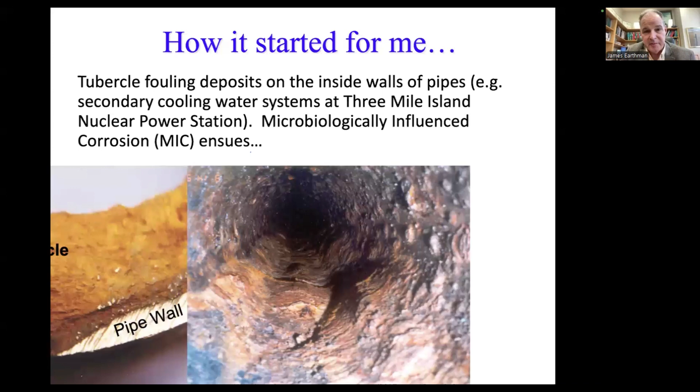And this is the problem that they create eventually, is that these tubercles get colonized by bacteria that can induce corrosion. The upper parts of the tubercle are typically colonized by aerobic bacteria. They consume the oxygen coming in, diffusing into the tubercle. And then at the bottom, there's typically anaerobic bacteria like sulfate-reducing bacteria that can thrive down there because there's very little oxygen as a result.

And the sulfate-reducing bacteria create iron sulfide. And the iron for the iron sulfide comes from the pipe wall. And so as you can see, you tend to get this localized corrosion, and eventually the bacteria will eat through the pipe wall, and then you have a leak and you have to shut down the system. Very expensive. Here's another pipe that had this problem.

Now, about that time, I happened to be in the Office of Research. I was Associate Vice Chancellor there, and I went to the Canadian Consulate in Los Angeles, and I met a couple of guys from a company in Irvine, and they had a water treatment system that they were talking to people in Canada about, and since they were from Irvine, I of course wanted to find out what they were doing.

They mentioned that they have their water treatment system in 36 different golf courses in Southern California, and they could demonstrate that if you use their system in the irrigation, you can grow greener grass with less water, and they could convince greenskeepers, who are typically very conservative people, that this is something they should lease. And I thought, well, I need to introduce these guys to Bill Cooper, because he's the director of our water center. He should know about this.

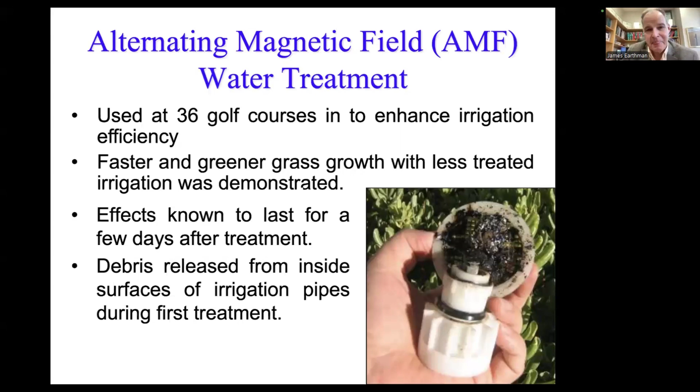So, Bill, if it weren't for you, I wouldn't have ever gotten into this area at all. So, thank you for doing that, and I appreciate you coming to lunch with us, even though you didn't follow up with them, and I understand why you didn't.

So we set up this proof of concept, and the pipe that was sent was in service for 30 years. It had a lot of tubercle deposit on it. They sent it wet, and they also sent two carboys, I think, of water from the secondary water system. So we used their water.

We set up two different test systems, two flow loop systems, one without their treatment, one with their treatment. We cut the pipe into two sections. We put one piece in each of the flow loops and started running the flow loops, one with the treated water, one without treated water, to see what would happen.

And so after 48 hours, we looked at the two systems, and this is an aquarium that we used as an expansion tank for one of the flow loops that had their system. This is their AMF. I call it AMF. It's alternating magnetic field, and I'll explain why later. And you could see that the water was fairly clear here. It didn't look too bad.

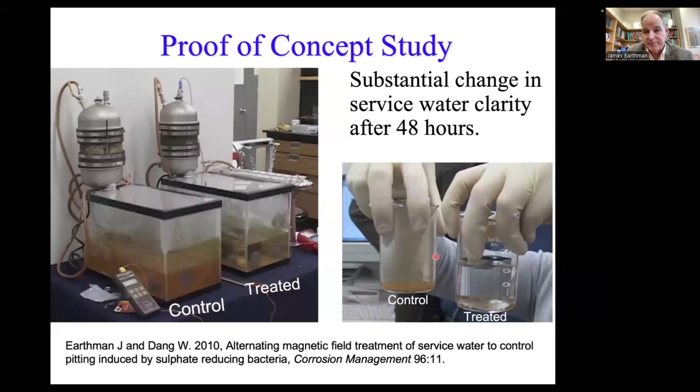Here's the water in the control system, and this is how it came. This is exactly how the water looked when it came from Three Mile Island. It was rusty colored. So we took some of the water out, and sure enough, it looked like you could almost drink the treated water. This is only after 48 hours of this AMF treatment.

We looked at the pipe samples, again after 48 hours. Well, the control pipe looked exactly the same, still had the same amount of deposit on it that it had when we put it in. The treated pipe looked a lot different, though. It had a different color on the inside. Let's go back and I'll show you.

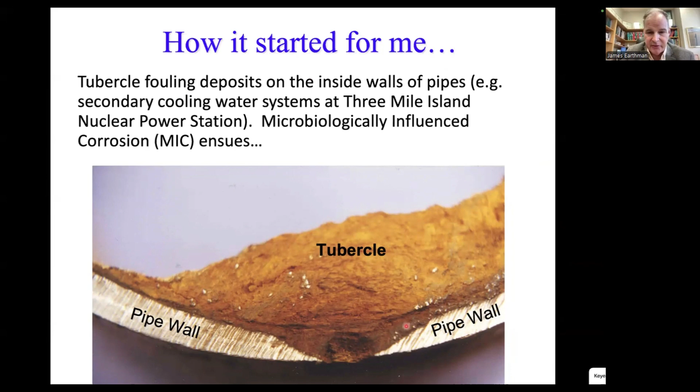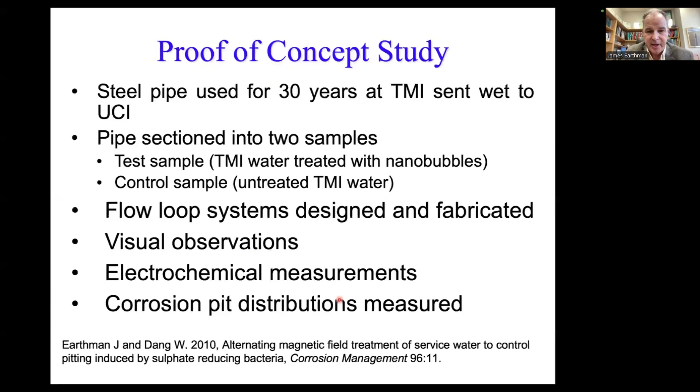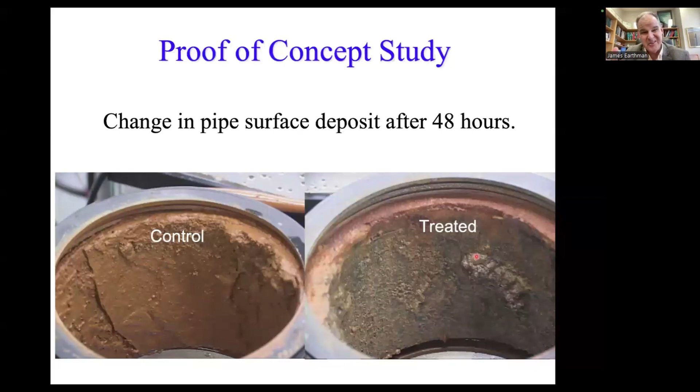If you remember, there was a change in color as you get down to where the sulfate-reducing bacteria are producing iron sulfide; the color changes to a gray color. Here's another example. Well, this is the gray color I was seeing on the inside of that pipe. So I knew we were down close to the substrate of the metal at this point. There was only this one little nodule left from the tubercle that sat on that pipe. So this is pretty dramatic. I thought, wow, I don't know what this is doing, but this is really interesting.

And in the expansion tank, in the treated water, there was this pile of debris that had formed, apparently from the pipe wall that had just fallen off. I thought, wow, this is something that's really, really dramatic, and I need to find out what's going on here.

So I started to talk to people on campus about it because it was clear that the people at this company didn't really understand what they were doing to the water. They said they were creating more energy in the water, but that was about it. That's about their best explanation for what was going on.

So I eventually got Ruqian Wu in physics involved, Professor Ruqian Wu, and we started talking about this. And he suggested, I think they may be creating nanobubbles. Now, I didn't know what a nanobubble was at that point. And so I started looking into it.

And the one thing I did know about this system is that the water that flows through it does undergo an alternating magnetic field. It's got permanent magnets that are arranged in such a way so that when flowing water comes through there, the water molecules experience a magnetic field that's oscillating, right? Depending on the flow rate, that'll determine your oscillation frequency. So the flow rate's very important, and that's all this was doing.

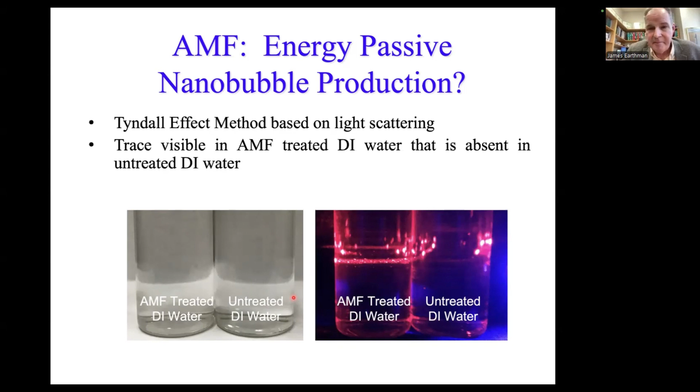But I did find that if we take deionized water and we run it through this AMF system, I can get this effect with the laser pointer. This is called the Tyndall effect, and this is what I showed you in the beginning. And people were reporting that this is what nanobubble containing water does. The problem, though, and the horrific part of it, is there was no real good theory for why nanobubbles should exist. There was a lot of skepticism out there in the literature. A lot of people didn't believe they could exist. And there's a good reason for that.

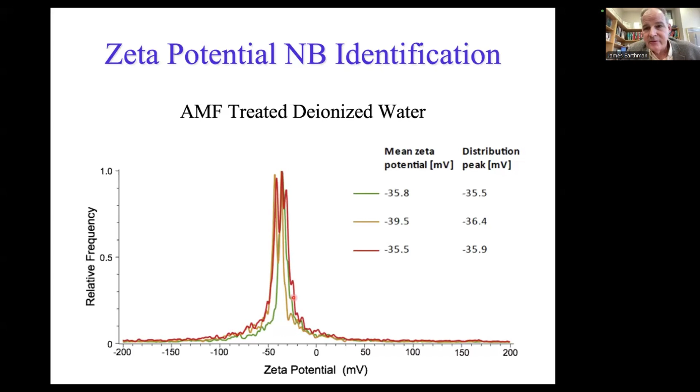The other thing I wanted to mention is in addition to doing this Tyndall effect test, we also measured the zeta potential of deionized water that we ran through this thing. And it was about minus 36 millivolts. We did 3 replicates, and we were pretty convinced that's what the zeta potential is for this. And of course, if you don't treat the water, we don't get anything for deionized water for this zeta potential measurement. This was done with an Anton Paar instrument. And so I looked up in the literature. Yeah, that's what the nanobubble should have in terms of a zeta potential. So that was also evidence that this thing was creating nanobubbles. But I couldn't find a good theory for why nanobubbles should exist.

There's other conventional nanobubble generation methods that people were already using. This is one we have in my lab now. It's what I call dissolved gas decompression. You put water in a container. This is actually a modified seltzer bottle. You put gas pressure on top of that water. 100 psi is enough. And then you release the water out a small orifice and tube, and microbubbles are produced. The water comes out cloudy, and after the microbubbles shrink below a certain size, the water gets clear, and that's when you have nanobubbles.

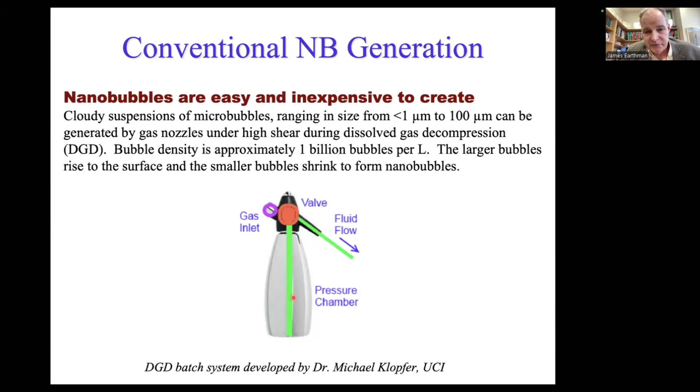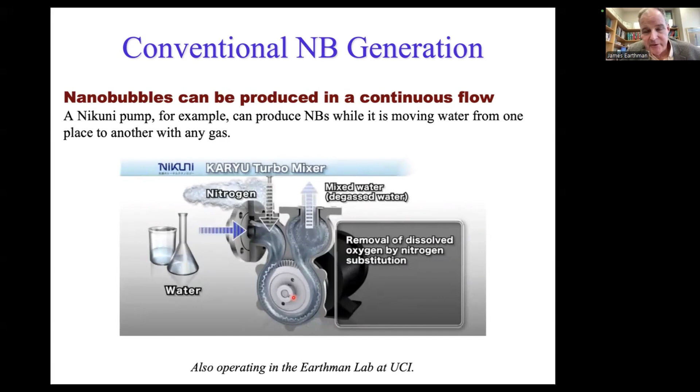Okay. Here's another method for making them. This is called a Nikuni pump. It's made by a company called Nikuni in Japan. They have an American division now that are creating these pumps specifically for generating nanobubbles. And they can show you that you can put different gases in the nanobubbles. And so if you take nanobubbles from those types of techniques, this is from the seltzer bottle, this dissolved gas decompression, you do get the zeta potential in this range of minus 30 to minus 40 millivolts, which you'd expect for nanobubbles in deionized water.

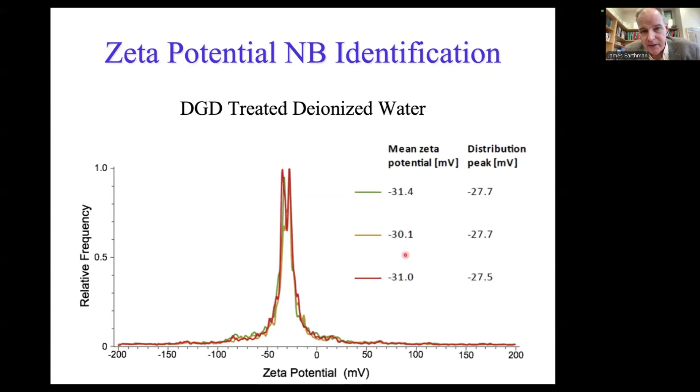So the problem is this.

Macroscopic bubbles, as we know, are just buoyant. They go up to the surface and they dissipate at the surface typically. A microbubble below 50 micrometers in diameter shrinks. The reason why it shrinks is that at that size or smaller, the surface tension pressure is high enough to push the gas back out into solution. So the bubble shrinks, the gas goes away.

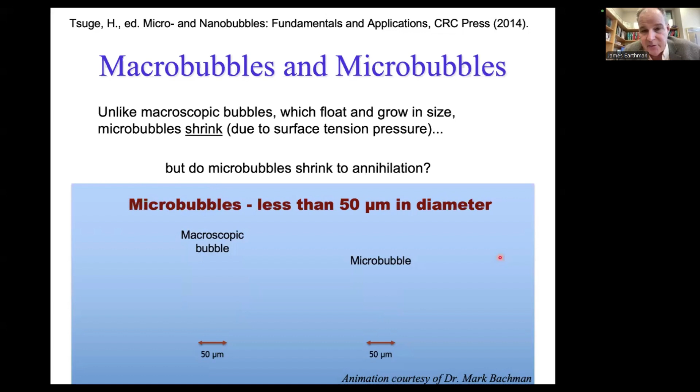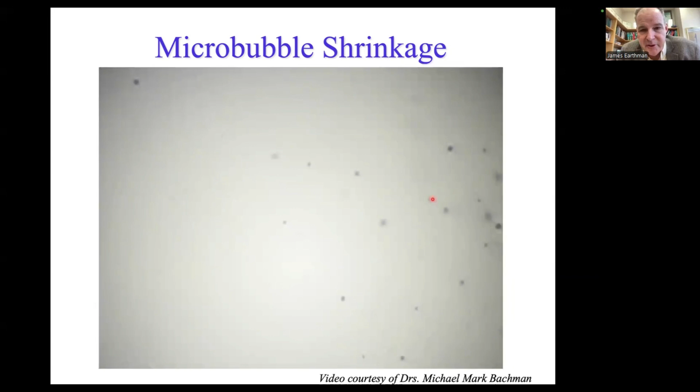And so most people who observe this, and we're going to look at it in a minute, thought that these microbubbles just shrink to annihilation because the surface tension pressure is only going to increase as the bubble gets smaller. So here's some microbubbles here. This is a video of microbubbles shrinking. You can see that it looks like they just go away. They go away to nothing, right? Here's another replay of that. Microbubbles, and they're shrinking, right? This is observable in the optical microscope, no problem.

So I fortunately at that time had a graduate student from India, Patrick Sapudi, who had a really good background in chemistry and physics. And I started talking to him about this, and he got excited and interested in it, and he wanted to work on it. And I said, okay, let's work on a theory for this. And so we did.

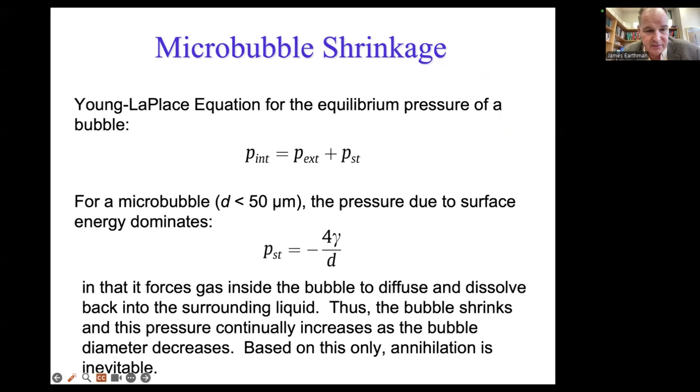Some reason my slide's not advancing. Let me try this way. Okay, there it goes.

So again, nanobubbles were observed by several research groups. There were a lot of groups in Japan for some reason. I'm not sure why so many groups are working on this in Japan, but a lot of groups in Japan were working on what they were calling nanobubbles. And they were reporting that nanobubbles tend to be around 20 nanometers to 1 micrometer in diameter. And they can be stable for many days. They were already seeing this long-term stability.

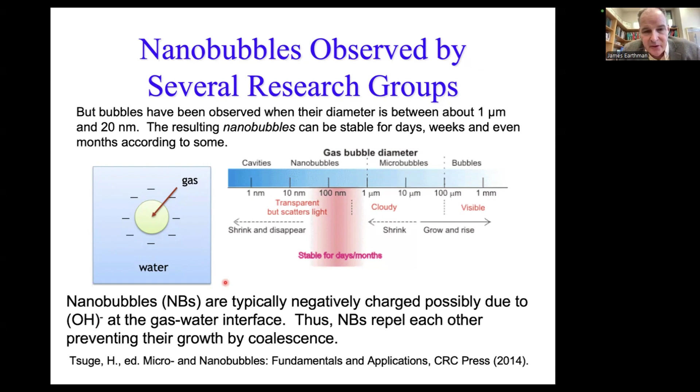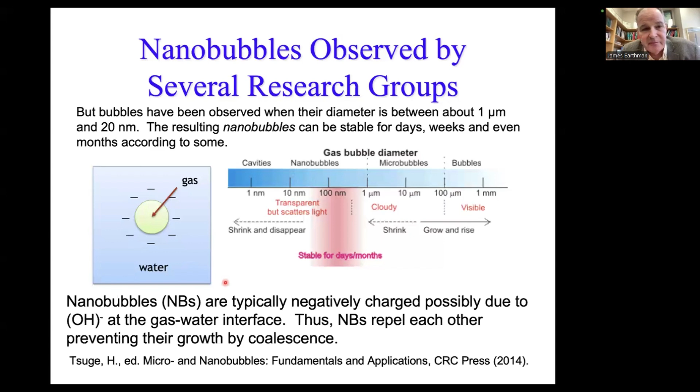And the nanobubbles were typically negatively charged, as I showed you with the zeta potential. And a lot of people were attributing this to OH ions, which are negatively charged. In deionized water, that's about all you've got in the water that's negatively charged. So that kind of made sense to me. Also interesting about the nanobubbles is they repel each other, so they don't coalesce. They don't come together and make bigger bubbles because they're all negatively charged. And a lot of people were reporting this minus 30, minus 40 millivolt zeta potential for them.

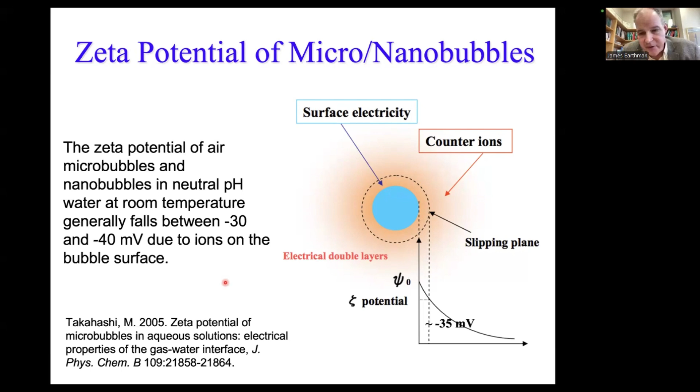And as a matter of fact, Takahashi, as you can see here, did a study where he measured the zeta potential for smaller and smaller microbubbles, and you can see that the zeta potential doesn't really change in neutral water. It stays within that minus 30, minus 40 millivolt range. That was kind of interesting. Zeta potential doesn't change. Whatever's on the surface of the bubble doesn't seem to be going away as it gets smaller.

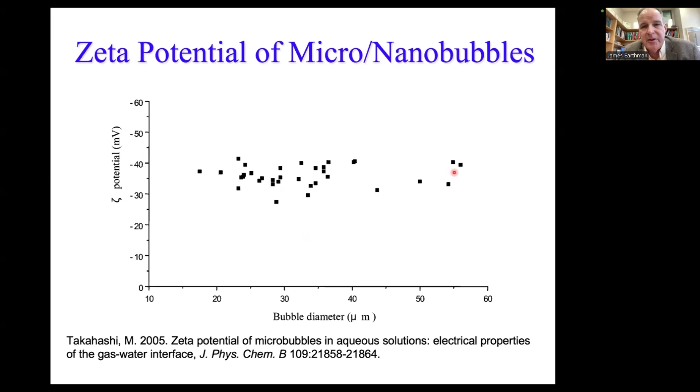All right, so we started looking at how OH ions could be doing this. And it turns out, not long before this, there were some publications which showed that OH ions actually have a huge affinity to gas-water interfaces. They will knock other ions like chloride ions off the gas-water interface to get there. And this was being reported.

Bai and Herzfeld, as you can see there in the third bullet, attributed this strong affinity to suppression of dipole moment fluctuations by the ions and a reduction of the loss of hydrogen bonds compared to water molecules at the interface. So there was a lot of literature and evidence to support the idea that OH ions have a much lower energy at a gas-water interface, and they want to stay there.

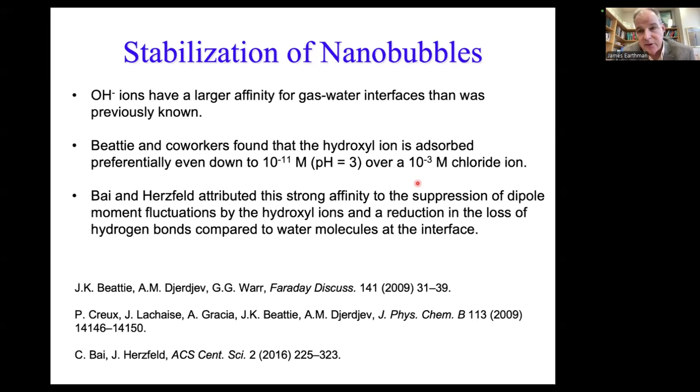So we introduced another term to the Young-Laplace equation. And this is a pressure due to the repulsion between ions on the surface of the bubble. We started doing calculations of what you would expect in terms of concentration of OH ions on a microscale bubble. And it turns out that you really don't get enough ions to do anything. They're not close enough together on the microbubble to repel each other. Therefore, you don't get stability.

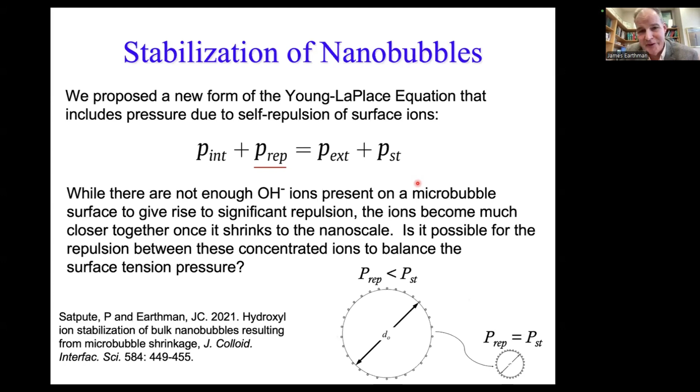But ironically and counterintuitively, if you take a microbubble and calculate how many ions it has on its surface and then shrink it by about 100 to 1,000 times, you'll find out that the ions that you start out with start to get really close together, and they start to repel each other. And so that was our theory. That became our theory, that it was the microbubble shrinkage itself, the thing that made it counterintuitive that nanobubbles could be stable, that actually leads to the stabilization of the nanobubble.

And one thing that was nice for me as a material scientist is that the ions, as they get closer together, should naturally form a close packed array. Now, we have lots of close packed arrays in material science and crystal structures. And I knew how to treat a close packed array of atoms, or in this case, ions, that had forces between them. And the force, of course, here results from the Coulomb charge that each ion has. And we could calculate what this repulsion pressure is.

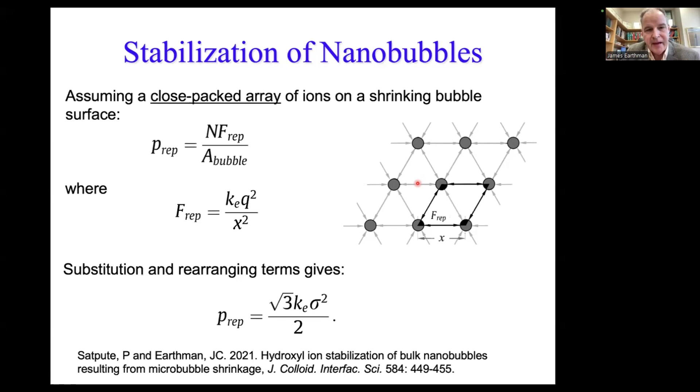And if you work through the math, you will find that the repulsion pressure, I'll just skip to this last result because this is really the important result. I can go through these other equations if you like, but I just want to show you this result here at the bottom. That repulsion pressure goes up by 1 over the diameter of the bubble to the 4th power. Okay? So that means it's going to catch up with the surface tension pressure, because the surface tension pressure goes up by 1 over the diameter.

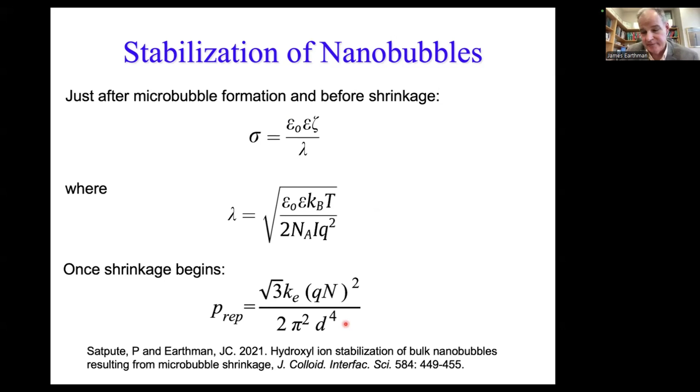So that was great. So we did some calculations, and lo and behold, you do get that this repulsion pressure will balance the surface tension pressure in the range of bubble sizes that were being observed for nanobubbles. The largest of which should be about 1,100 nanometers, because that corresponds to starting out with a 50 micrometer microbubble. If the microbubble is larger than this, it won't shrink. Surface tension pressure is not high enough. But if it's this size or smaller, it will shrink to the nanoscale. And according to our theory, it should stop shrinking because of the repulsion pressure at about 1,100 nanometers.

Okay? So first thing I wanted to do when we saw this is see if there was any experimental data to confirm this, and it turns out there is. This is some data from a group in Japan who did Zetasizer Nano measurements. This is a light scattering technique. They could measure the zeta potential. They could also measure the size of the nanobubbles with this instrument. And it's a light scattering method. It uses a CCD camera.

And they measured the distribution of nanobubbles produced by a large, diverse microbubble distribution. So they would start out making microbubbles. They wait for the microbubbles to shrink, and then they would make these measurements of the nanobubbles. Okay, and these are the average of 10 replicates for them. The mean microbubble diameter they start with was 56 micrometers, so even above the 50 micrometers in size, but anything larger than 50 micrometers won't shrink, so it won't form a nanobubble, according to our theory.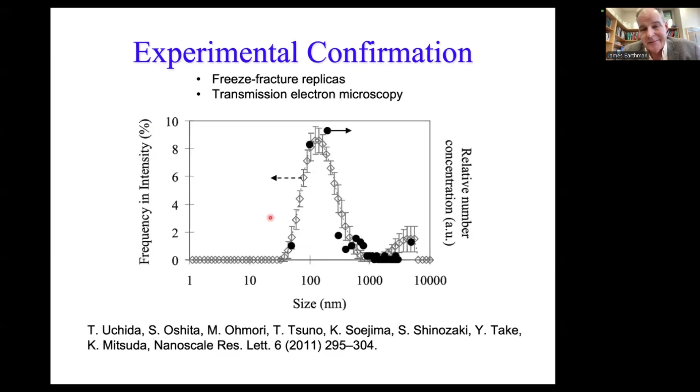And that was actually one of the criticisms of our paper. And when I explained to them, look, yeah, you can put a lot of pressure on these things, nothing will happen, but look at where they're balancing at. After I rebutted that comment, we got accepted.

Anyway, what I was really interested in was not so much the nanobubbles themselves, but how they interact with nanoparticles. Nanoparticles have a very high surface tension as well. And if they encounter a nanobubble, they will bind to it. The hydrophobic forces can actually overcome differences in charge between the nanobubble and the nanoparticle. In other words, if I have a particle that's minus 5 millivolts, it'll still bind to our nanobubbles, which are minus 30 millivolts or more. So this hydrophobic force at this size scale is really powerful.

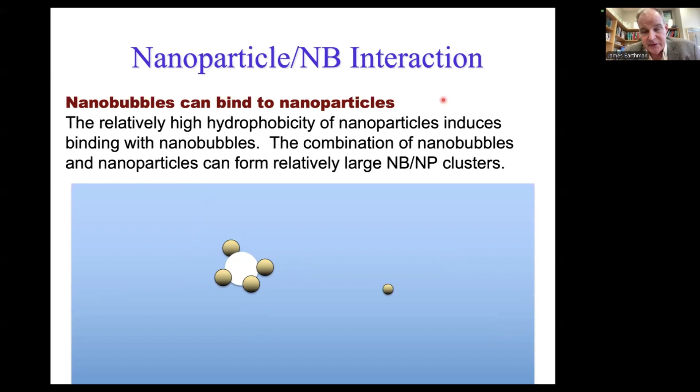Now, these particles may not be stable. They may be embryos. They could be at the solubility limit of this solid, and they could just be forming and dissolving over time. But if they bind to a nanobubble, their surface tension is going to go down and they're going to become stable. And if we keep doing that, we can force the concentration of that solid to below the solubility limit.

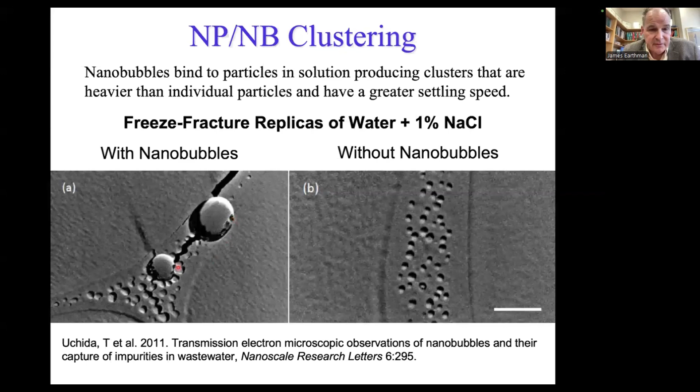Here's some freeze fracture replica images of some nanobubbles and nanoparticles that were published by Uchida and his group. And you can see here, this is for 1% sodium chloride. So these are sodium chloride nanoparticles here. And you can see that some of them seem to be binding to this nanobubble. This is just with the nanoparticles, the sodium chloride without the nanobubbles. So here you can see the nanobubbles, pretty clear distinction. And you can see the nanoparticles are binding to them.

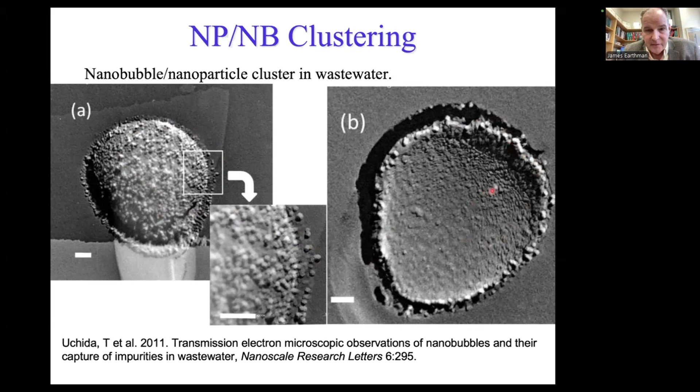They also did the same thing with wastewater. And of course, with wastewater, you're going to have lots of nanoparticles. And you can see around this nanobubble, there are a lot of nanoparticles bound to that nanobubble. Which makes sense because these nanoparticles would be very hydrophobic.

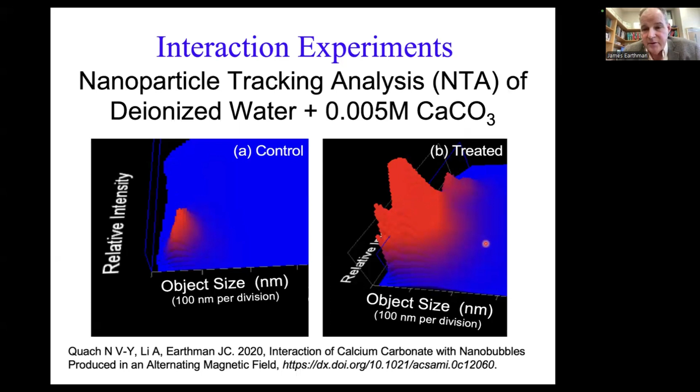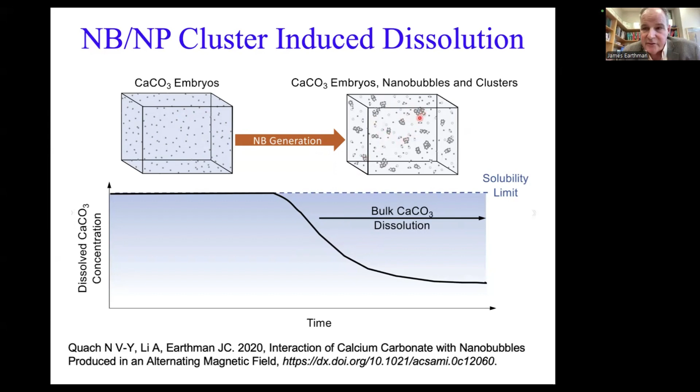So you're typically around the solubility limit of that compound in the water when you have it depositing on the pipes, when it's fouling. If you add nanobubbles, you're going to form clusters. Those clusters are going to stabilize these embryos over here, and they're going to keep them from dissolving back in solution. And you're going to force the concentration below the solubility limit. If you keep adding more and more nanobubbles to this, the concentration won't be able to catch up. You can keep it down, and you can keep dissolving the fouling solid that you got in the system by just adding more and more nanobubbles this way.

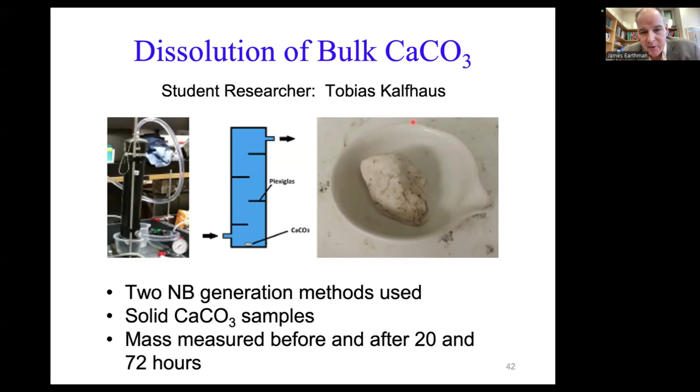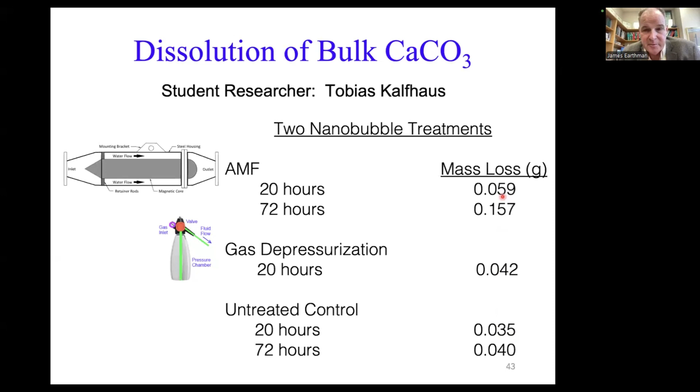After 72 hours, we had a mass loss of 0.157 grams, and in the DI untreated water, we had 0.04. Not much change here. Now we expected some loss because we start out with DI water. There's no calcium carbonate to begin with, so you're going to dissolve some calcium carbonate just to bring the concentration up to solubility limit in the control. So that we expected, but it wasn't nearly as high as the mass loss we saw with the nanobubbles, especially with AMF.

So this is our strategy. We form these clusters. We can force the effective concentration of the solute down below the solubility limit and start dissolving it as much as we want, as long as we can keep adding more and more nanobubbles.

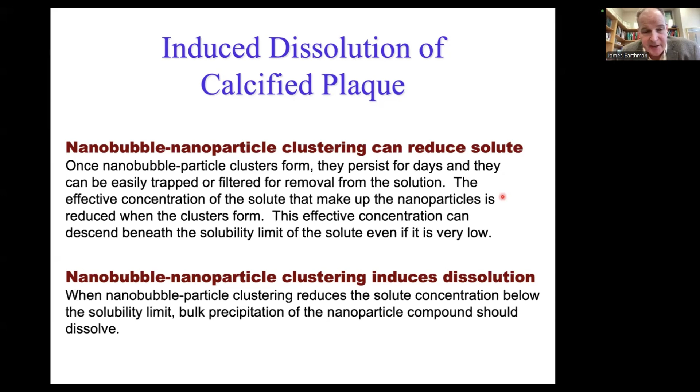We checked this, to see if this would work with cadaver arteries that had plaque. In this case, instead of calcium carbonate, we had calcium phosphate in the plaque. And we measured the size of the plaque using IVOCT in Zhongping Chen's lab here in biomedical engineering, before and after adding nanobubbles to the artery.

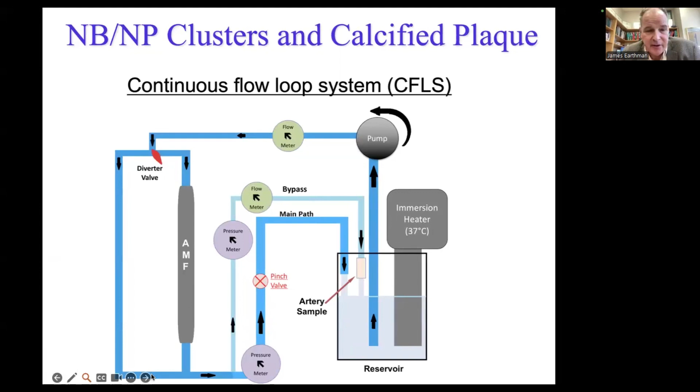So here we took our ex vivo, these are from cadavers, artery sample. We ran a Ringer solution, which is an intravenous fluid, through the artery, so it had the same approximate concentration as blood of salt and other additives, and also nanobubbles in some cases. And so we wanted to see if the nanobubbles could actually lead to greater dissolution of the plaque. And in fact, we did find that.

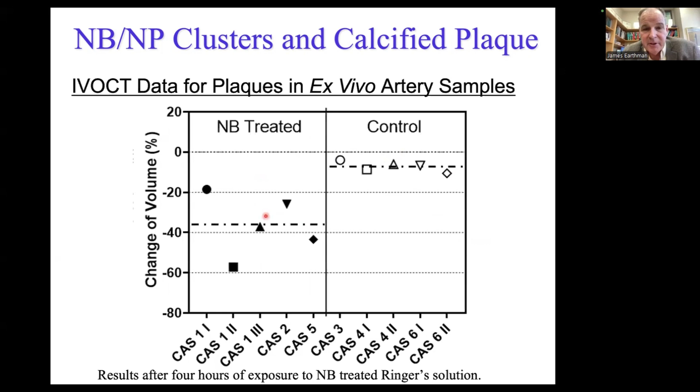And here we did it again. This is after, I'm sorry, 4 hours with nanobubbles for 5 different samples. This is 5 control samples. And again, big difference in reduction of that plaque.

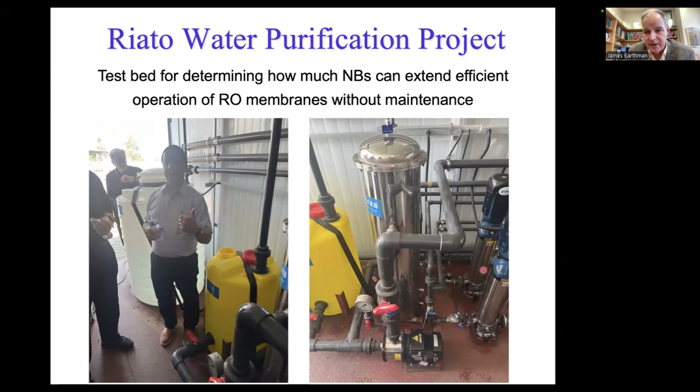We've also been recently talking to some people who set up a test system in Rialto. They're hopefully going to be working with me and Diego Rosso in the future with DOE funding. This was just a pilot project that they were able to do with some money from, I think, the CEC. And they were able to set up 2 systems over here for treating wastewater with RO, with reverse osmosis.

They have 2 AMF systems. One is a dummy system. One just has an empty core, no magnets in it. The other one has magnets, and here are your RO membranes over here. And they were able to actually increase the life of the membranes without maintenance by a factor of 5 with the active nanobubble generating AMF system. So that was very promising.

So we're now working with them on a proposal to DOE to continue working on this for reverse osmosis. And this is where I think we can have a big impact on water purification desalination, because, like pipes, RO membranes and other fine filters also get fouled and get clogged up and have to be cleaned or replaced after a certain period of time. The more frequent that is, the more expensive it is, of course, to run the plant.

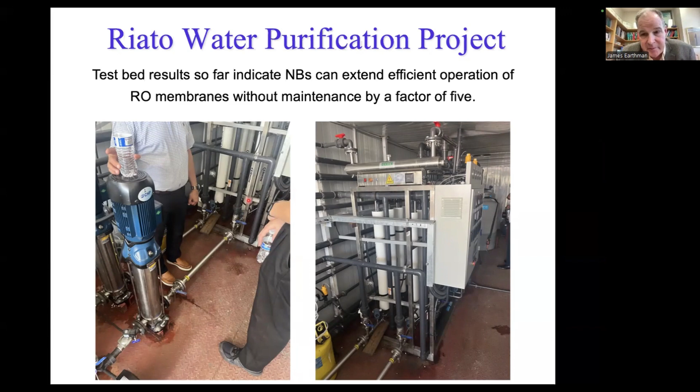And so, in conclusion, I just want to say nanobubbles naturally become very stable under ionic repulsion pressure that balances surface tension pressure. That's our theory. It constitutes a hybrid object made of gas containing a 2D ionic solid. It's really kind of like a solid around the gas, that ionic shell. And the nanobubbles can be produced easily and plentifully by multiple methods, including this alternating magnetic field generation method that doesn't require any external power, just flowing water.

And experiments have shown that treating water and other aqueous solutions with nanobubbles leads to formation of stable clusters with embryonic nanoparticles that can drive dissolution of undesirable fouling deposits.